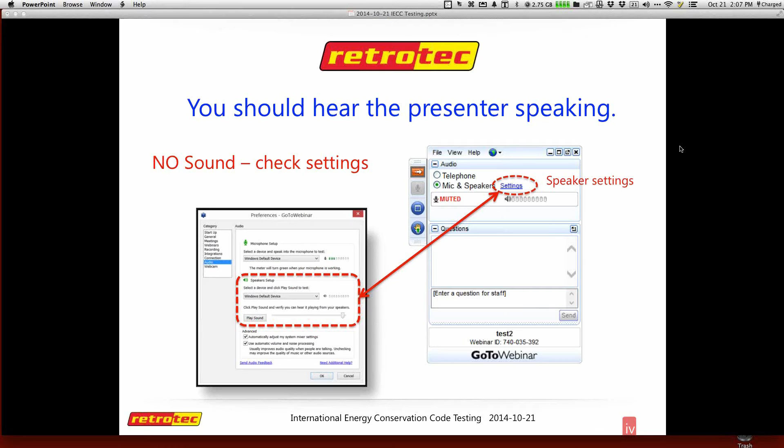I am actually an independent trainer for Retrotec. It is not my goal to sell you anything. In fact, some of my slides sometimes include Energy Conservatory, and it's our goal to promote the industry. So if you're looking for some of the information or illustrations I have here, they're usually in the quick guides, and they go through exactly what we're going to cover today. It's a great resource: under support, we have quick guides and webinars. All these things are a great library for you to pick from.

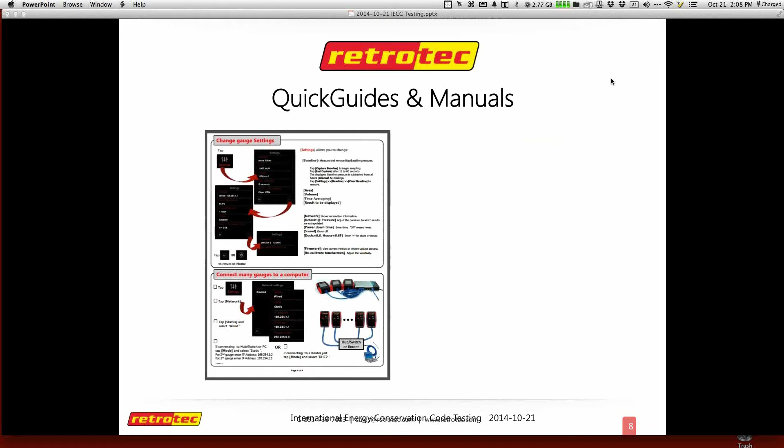The quick guides are like a field guide, a how-to, and there are some that are actually designed for code officials. The manuals are an in-depth study of the actual topic, from air sealing to blower door or duct testing, and many of them are several hundred pages that cover the topic in a variety of ways. So if you're looking for some phenomenal information, dig into one of the manuals. You can always reach out to Colin Genge directly if you have a question about them. He responds directly to your feedback.

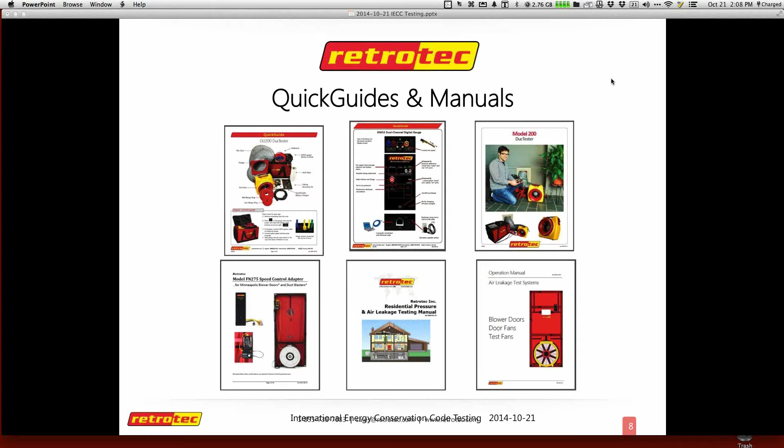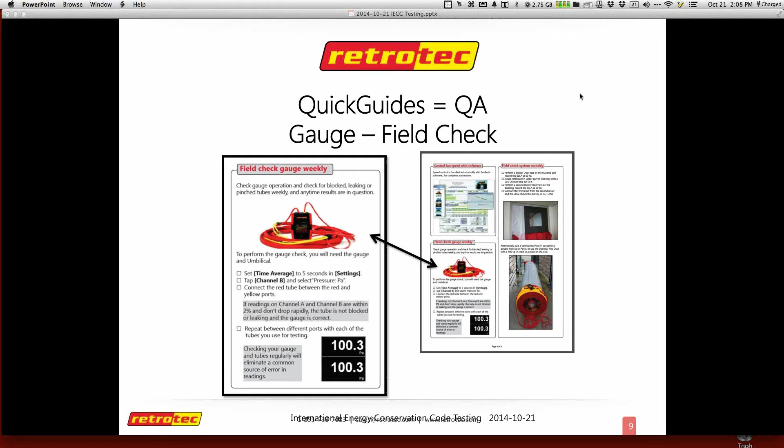So whatever you're doing, there's a guide to help you go through it, and they actually work as a great QA process because they have little check boxes on them, and they have ways to check your gauge that should be done weekly, or at least before a test if you're not testing weekly, and even how to check your blower door and other fan systems.

For those of you that have the DM32, the touchscreen gauge, you should make sure your firmware is currently on version 42. You can see that at the bottom of the screen when you first turn it on, or you can go to settings and toggle through a few pages, and it'll have firmware information. If it's not 42, you can hook it up to your PC with the configurator, or download the configurator if you've not done so, and we highly recommend you keep your gauge up to date, because there are lots of great improvements. That's why that gauge is such an amazing device, because it can actually update itself.

I am actually an IECC residential and commercial code plans examiner and inspector. I took my first test back in 2006, when there were trade-offs and other challenges.

So I am very in tune with the code and keep up with my certifications with ICC. I'm also a residential building official, non-practicing, but I play one on TV, or on webinars, and that's one of my personal achievements. I do want to go back and do some others.

If you have not thanked your building code official, I highly recommend you do so. Some are challenged individuals, we all have our idiosyncrasies, but their job is an incredible challenge to help guide builders on what they have to do while maintaining a great relationship in the community. So I highly encourage you to appreciate your building code official. Christmas is coming up soon, and they would gladly appreciate a gift certificate or a lunch certificate. So I always recommend complimenting those guys on what they do.

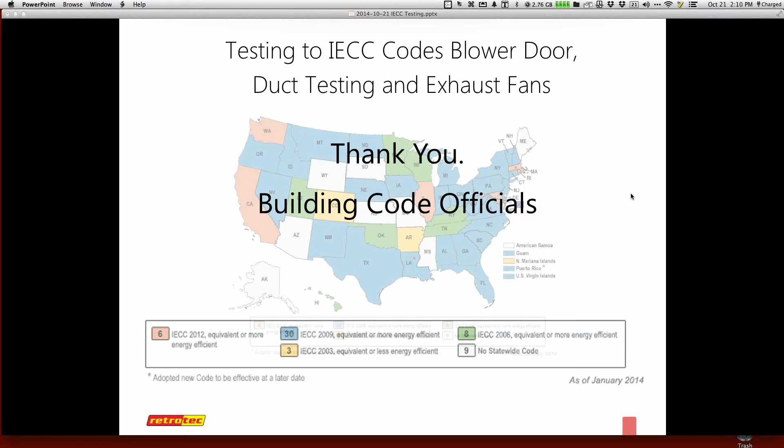And Jesse, I will touch on your thing about not reaching 25. So leave some of those questions up there, Jay, so I can check on them.

For 2009, the slide I had shows that leakage to outside is an option. The total leakage gets reduced significantly in 2012, and you can do it either at post-construction or as a rough-in, but it's the same number. In 2009, they gave you an advantage to do a rough-in, and there's even another option where you could do a rough-in without the air handler, which made it even tighter, so you're just testing the actual duct systems.

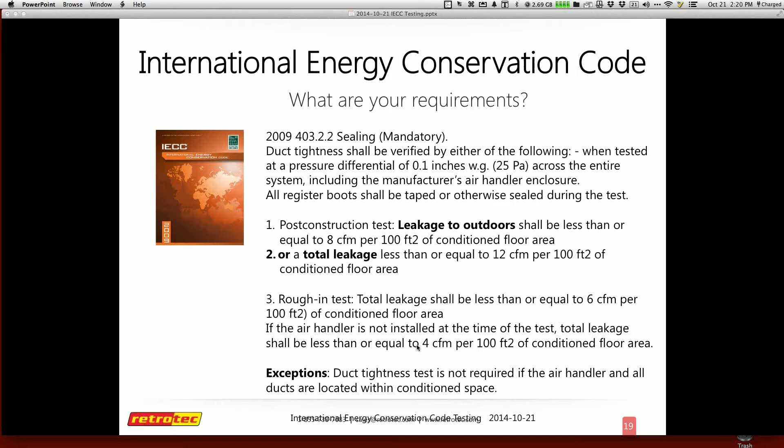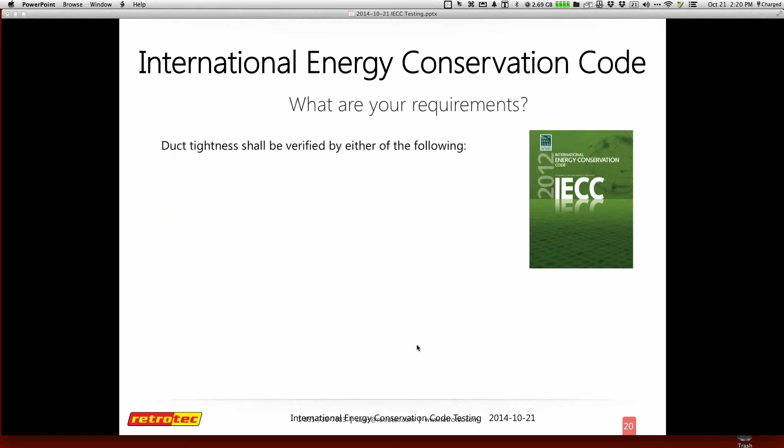So these are the criteria. Some people are still on 2009 code, or will go to 9 or adopt these themselves. Georgia adopted this with a few more amendments, and even adopted blower door testing at the same time. So the 2012 code really starts to make ducts incredibly tight, and if you're not on your game, it'll be a little challenging as to when this comes into play.

So we're now down to 4 CFM per 100 square feet. Just as a reference, years ago Energy Star, a high third-party standard, was at 6 CFM as a good achievement, a place you wanted to get down to, and then they got it down to 3. So the code is really trying to keep up with third-party building requirements like Energy Star and LEED and others. We really are pushing the limit and the envelope, literally, to create high standards.

So if you have questions about these, I can gladly go through them, but those are actually the requirements. There's some stuff to set up, which my slide didn't work well. Retrotec and Minneapolis do things a little slightly differently, but it's the same test, the same fan.

We highly recommend you depressurize. There are only a few jurisdictions that state you must pressurize, maybe because the flow is the same as the HVAC system, but the reality is we feel you get a much better test when you depressurize. When depressurizing the system for the ducts, you actually pull all of the duct mask really tight against the registers, so it has a really good seal. If you pressurize, you may have small separations you don't realize, with air flowing out of the register underneath the duct mask.

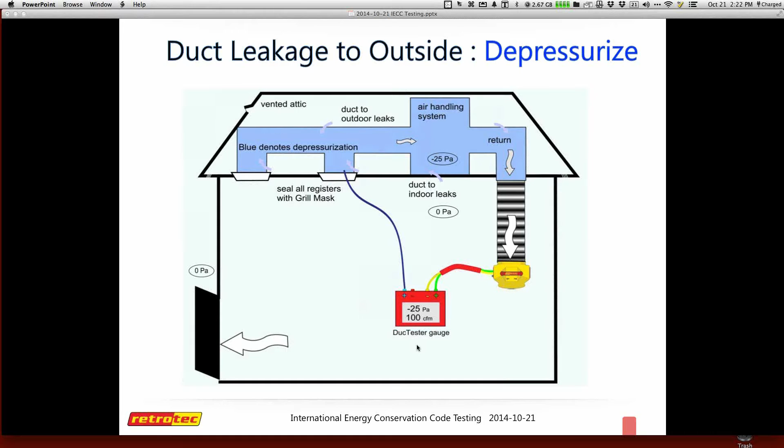And here's leakage to outside. I'm going to jump back to it because I want to show the process for depressurizing. So if I pressurize, same concept, sorry the slides got out of order, I forgot to rearrange them.

So now instead of depressurizing, we're just going to pressurize. You can notice I turned the fan around, and you can see the red ranges or rings on the bottom, and now I'm pushing air in versus pulling air out. Again, I could have some small separations with the Grill Mask, but either test, any testing you do, is a great test. So you can decide which one works well for you. The depressurization process has some other benefits, which I'll come back to.

Okay, I'm going to stay with pressurization because this is the common test everybody does. This is leakage to outside, a concept where I want to neutralize any leaks coming into the interior. All of my leaks are now considered total leakage at this test, because it could leak from the ducts in the attic or crawl space, or from a return or something else that leaks to the inside.

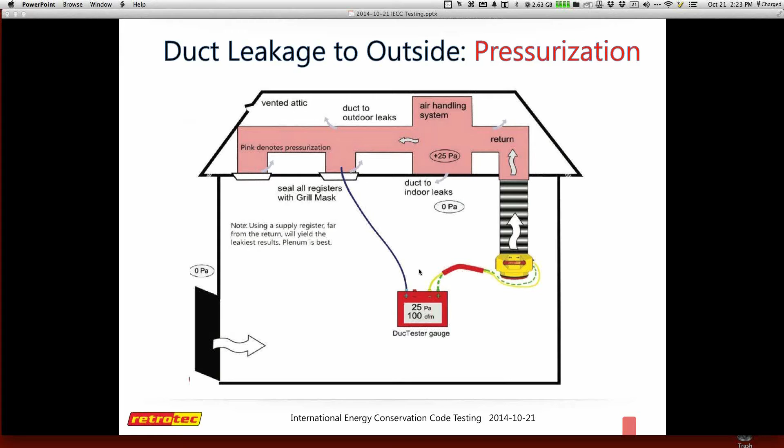When I set up a blower door and pressurize the interior of the house, this area down below gets neutralized because I now have an equal pressure across the envelope. So I separate the ceiling or the floor, wherever the ducts are, from the house to the outside. Now the only place it can leak is outside.

One method of testing is I can bring up the fan to 25 pascals, then take the ducts to 0, which creates a neutral pressure. But on the Retrotec system, here's the duct tester where my pointer is, we've added an extra reference, which is the red. I'm now referencing outside, the same place the blower door is testing, whether you combine the tubing or run your own tubing outside, so now I'm referencing outside for the duct test. It has its own separate reference.

This allows you to go to 25 pascals and not try to find 0. It also allows you to use the add feature on the gauge, which will help you confirm what your results are at 25.

I'm going to go back to the slide I had a second ago. This is why this is one of the tests I think is useful: usually you set up the blower door and depressurize as a standard operating test. If you depressurize your ducts, you can do one and then do the other, and everything stays the same, nothing to actually change. Then I can seal off the ducts and do a total test. So this was my leakage to outside, and then this is...

I'm missing a slide. There it is. Sorry, I'm missing a slide, that's frustrating. Anyway, I'm going to move past that.

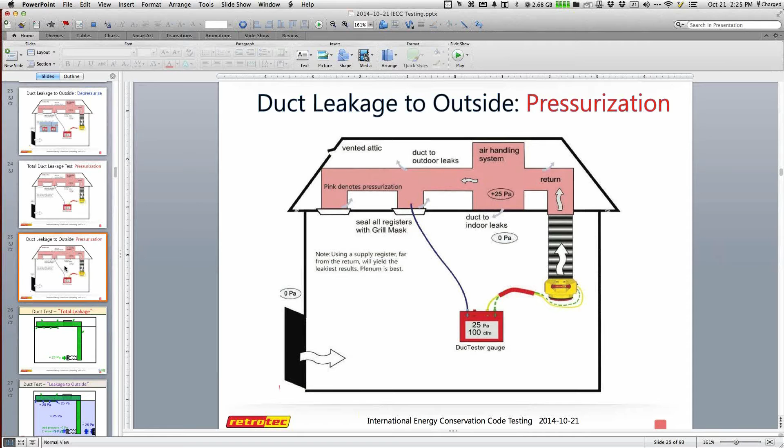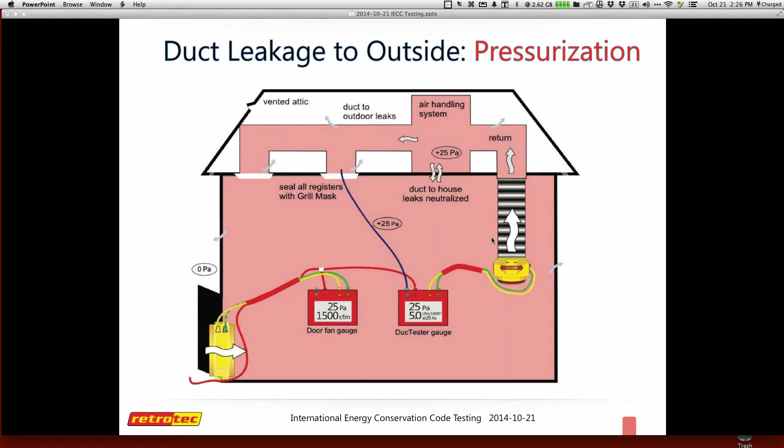It's similar to the concept where I had pressurization. You can do the same with depressurization. Somehow I lost the illustration that showed up with that, but instead of pressurizing both, I can depressurize both and it works the same. They will just pull on each other until they equalize at the same number, so it'll be negative 25 and negative 25, and I can get a number that is leakage to outside.

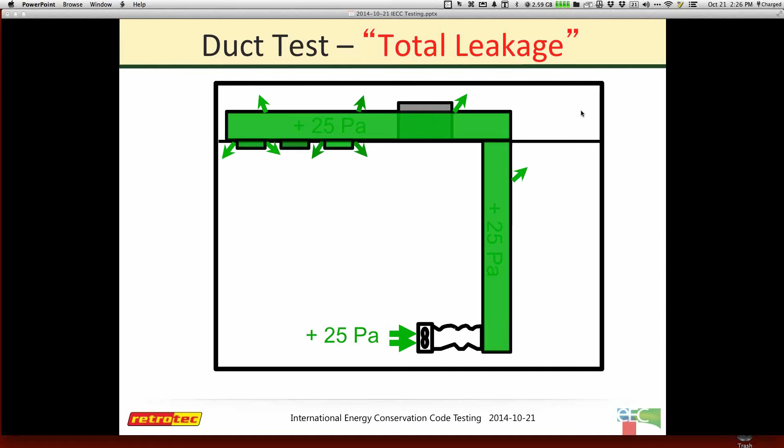Another way some people test is the test to 0 method, which looks similar: I have my duct tester normally set up giving total leakage, and then I can move on to adding a blower door, and now I'm going to pressurize the area. So this is a pressurization test, and wherever I have leakage, I'll end up with air moving into the ducts. This is the test to 0 method, where I add my duct test, and it will pressurize until it gets to 0 and negates the actual area that's in the house itself.

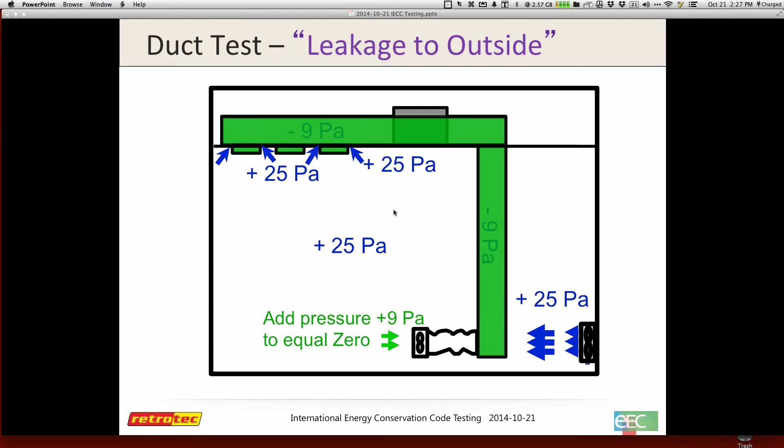So there are 2 ways to test. The code does not clarify which way you go or how you actually set that up. I didn't have a lot on duct testing because many people are already doing that. A lot of people are headed towards the blower door.

I just want to see if there are any other questions. Al asked, what's the advantage of putting the hose outside to a manometer? The advantage is that I have a much easier way of maintaining the pressure at 25 versus trying to get it to 0. If it goes past 0, it's a lot easier to let the gauge do the work. It's hard to tell the gauge to go to 0 or set pressure 0; a lot of times it overshoots 0 and doesn't want to come back.

So you can do it manually on the fans, but it's a lot easier to set up my system where I can tell the duct tester to go to 25 pressure or depressure, and do the fan. As long as both fans are doing the same thing, pressurizing or depressurizing, it's a really stable way to test and confirm what you have, and you get to use the add feature to confirm that.

Hey Joe, we got another question here. Are the grills still taped when doing total leakage? So total leakage is when the grills are sealed off, right? Because what I'm trying to do is just the duct tests themselves. So for total leakage, I've sealed off the ducts, and I just want to find out where they leak.

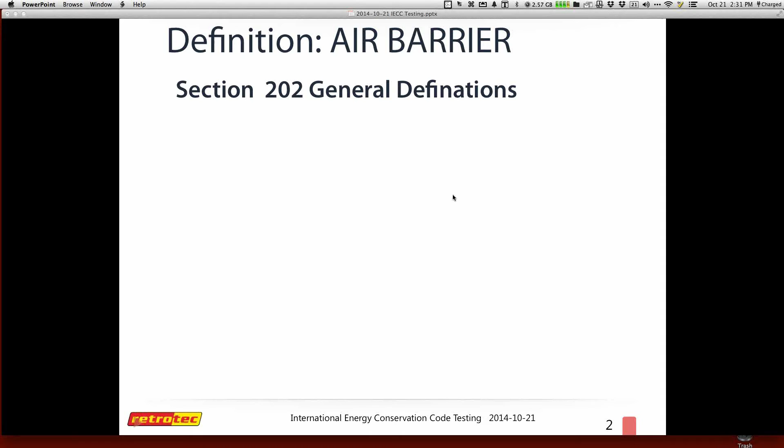Any other questions on duct testing real quick? Check it over. Yes, my point - it depends on which method or how you want to do your blower door duct test as to when you'll decide to cover them to do a total leakage. And confirming, when I do leakage to outside, my registers are open, they're not sealed, so I can actually get a separation right there.

Okay, so moving on to blower doors. If you still have another question about duct testing, we'll gladly grab that from you.

Blower doors are something many municipalities are moving into, and for some reason they find this to be the more challenging test with potential issues. The reality is they're right for one reason - if you're going to test the house when it's completed and ready to move occupants in, and you have issues, they are not easy to find or get to. With ducts, many times they're fairly accessible, and I can get to them at any stage, whether it's attic or crawl space, unless they're totally sealed off inside the area, and a lot of times they weren't tested anyway.

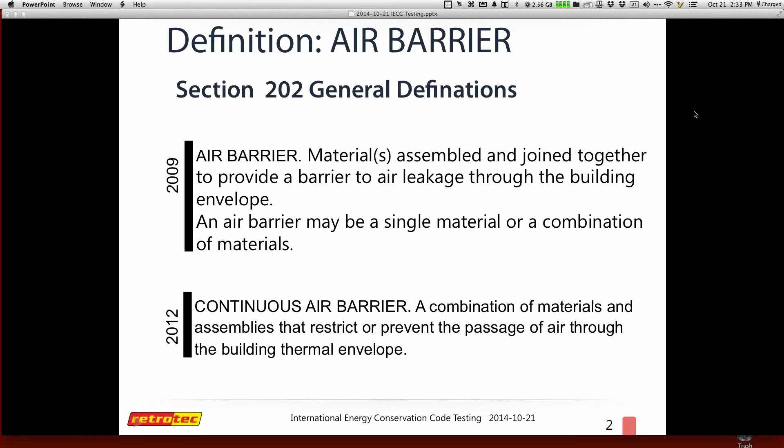I will not take on the debate on whether or not house wrap is an air barrier - that's another day. There's the ABAA, Air Barrier Association of America, which has some phenomenal videos and criteria about what is considered an air barrier. But basically, if air doesn't move through it, in general, it's considered an air barrier.

The code has this phenomenal checklist, and if you're new to blower door, if you're working with a builder, I highly encourage you to make sure that they check these 17 areas. Most people that actually do a good visual assessment pass. When they're just hoping that they do what they normally do without actually being very detailed, that's when things happen and it's already too late to get to them. So this checklist, and many times it's actually required even if you test, that you must actually comply with this checklist.

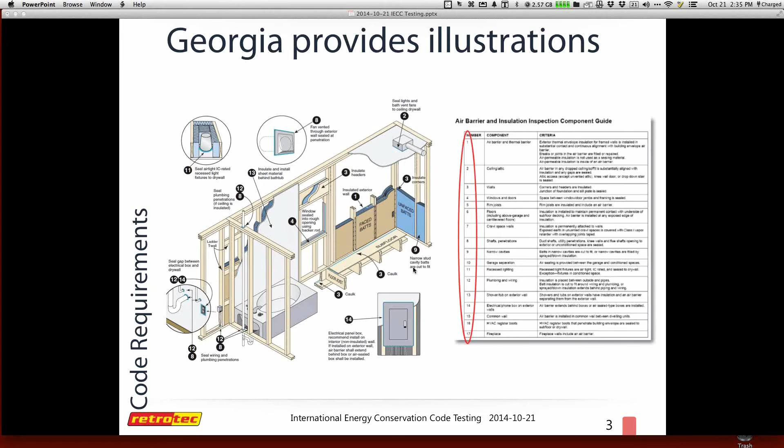So Georgia created some phenomenal illustrations that actually coordinate these numbers specifically to the code and where it is. So if you're dealing with, you know, areas around the tub, those actually coincide to the numbers that are here, right? So most people ask, oh, where can I get these? These are free. You can use these for yourself, give them to building officials, give them to contractors, whatever you want to do with them, all right? They are a phenomenal resource. And they really kind of do highlight some of the realities that you see on the left and how those can get overcome.

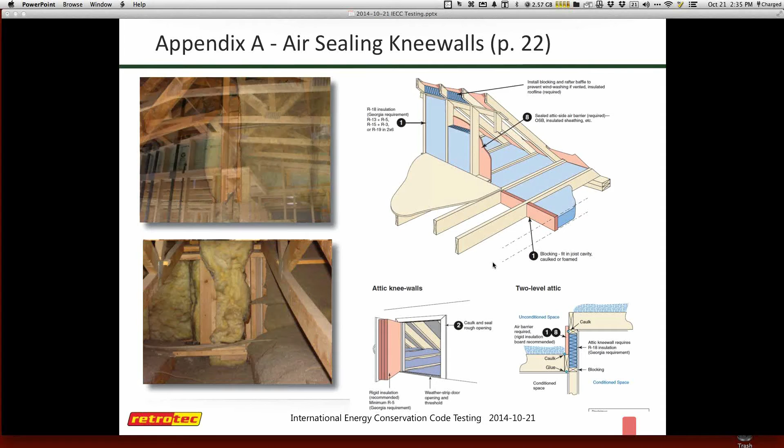The one that's mostly a common challenge for people is the attic and the knee walls. You can see now what a typical knee wall would look like, but now it has to be encapsulated on all 6 sides with an air barrier that also complies with your ignition or fire rating concepts. So these are what a really well done attic would look like. These knee walls are taken care of ahead of time so that you could insulate from the interior and everything happened all at once.

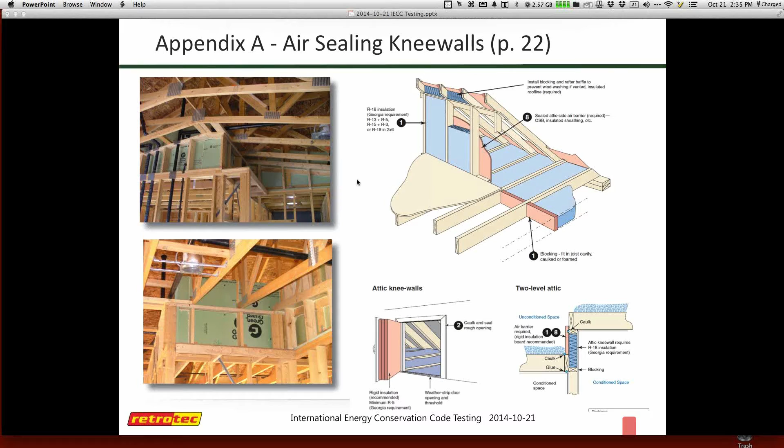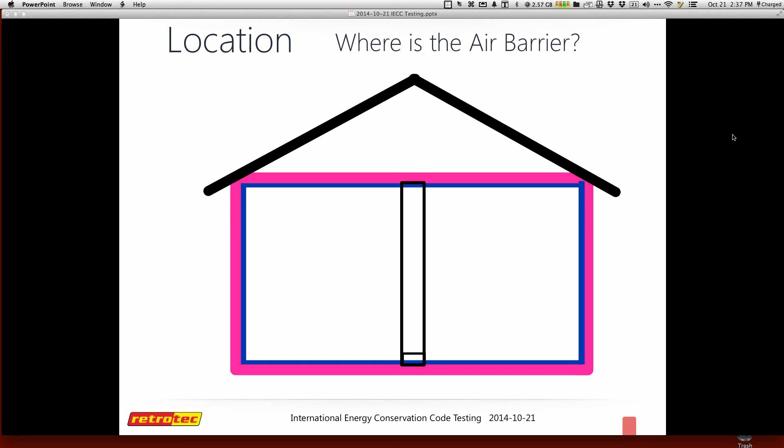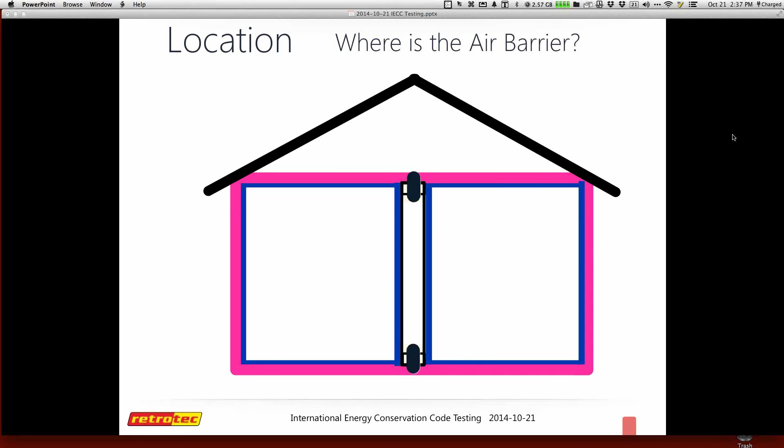But what happens is that we actually start cutting holes in it, and we add some framing. I've got other things that start showing up. Now my air barrier has been separated. Now I actually have connections between the attic or crawl space from some holes for some electrical wires. Now I've got pathways for air to be moving directly up and down my walls and come out either receptacles or plumbing openings. And if you add your air handler or can lights or a junction box, once I penetrate or cut any part of the air barrier, then that element actually becomes the air barrier.

So if you start following the air barrier around, you can see that the junction box becomes the next connection between inside and outside, or the air handler will also now become your air barrier. If there's leaks in your duct system and you run your blower door, which is where we're headed, it will actually allow air to move through your air handler or your duct system and come out the registers when you have leaks, because it actually wants to know where's the separation between inside and outside, and it will help you find all of these locations.

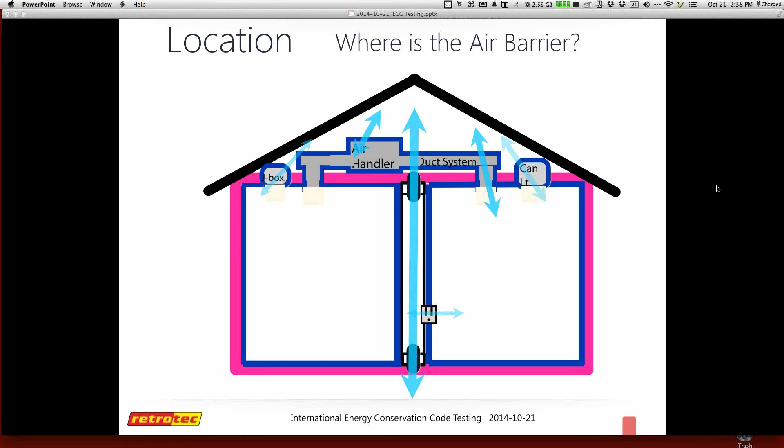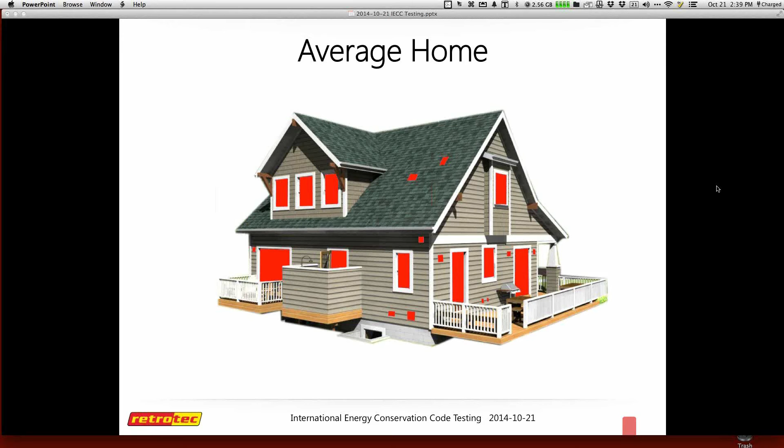So we take an average home and we kind of cut it apart. We put a bunch of darn windows and doors, and we add openings for receptacles and vents in the roof, and so we end up making this monstrosity of a whole bunch of openings. Most of your windows are phenomenally well sealed. It's the large opening around it, and same with the doors. So we have a much larger opening than we do actually for the door or the window itself.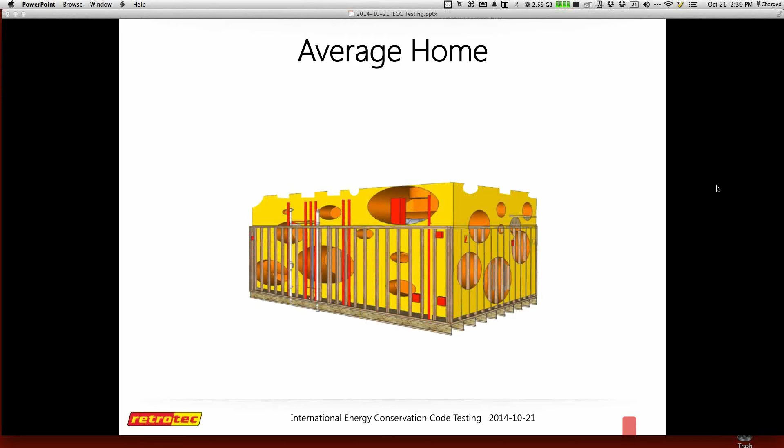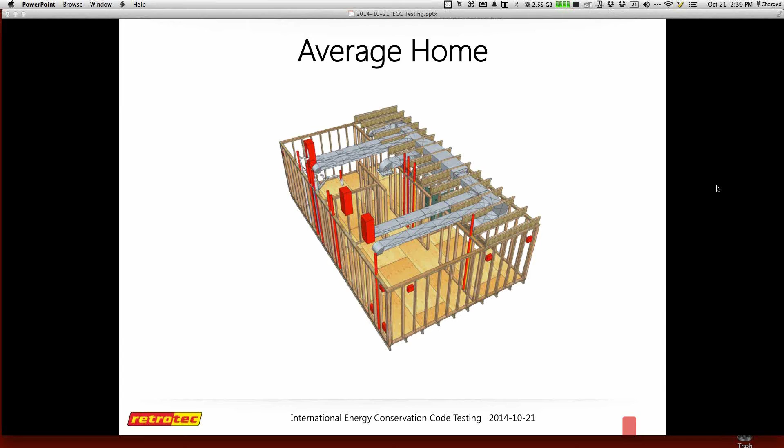So I made this illustration that tries to show what our homes really kind of feel like to me. And it isn't always just the envelope. It actually becomes also the conditions that are connected between floors that also are a major issue, whether it connects to the attic or maybe it connects two floors or to the crawl space. These are just some of the penetrations that happen from plumbing, not including electrical or can lights or some of the other smaller openings that all add up to large significant leakage between attics or other floors or exterior and interior, so we're back to this major Swiss cheese element of a house that we end up creating.

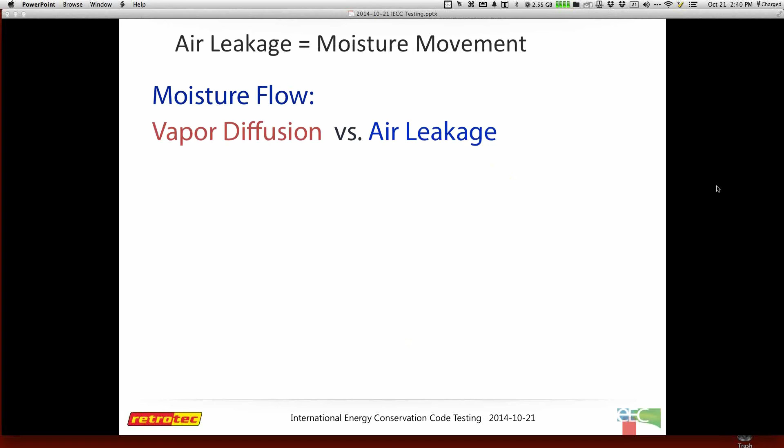So we have a whole lot of openings that are in the house, and our goal now is to actually test them and figure out what these issues are. This is a quick illustration that hammers home why these little openings make a big difference. This is from buildingscience.com, a study that Joseph Lstiburek did. I'll explain the study briefly here, and that is that I have 2 sheets of drywall on each side. They're both a 4x8 sheet of drywall. They both have the identical temperature and relative humidity. So it's only 50% relative humidity, very, very tolerable. 75 degrees, very nominal, right?

And so one is actually diffusion, where you have moisture that moves through materials. All materials usually have a diffusion element, or one small square inch hole based upon these small conditions, right? So after 1 week, they measured how much moisture can move through a tiny little 1 inch hole. And over here we have 1 1/2 pints of water that diffuse through the materials. The other side has 14 pints of water. So it was a significant amount of moisture that comes through a small hole. The average home has an opening that's equivalent to around 2 square feet. That's actually a code compliant house. So it's easy to imagine how much moisture load gets pulled into our houses year round. So it's a phenomenal illustration.

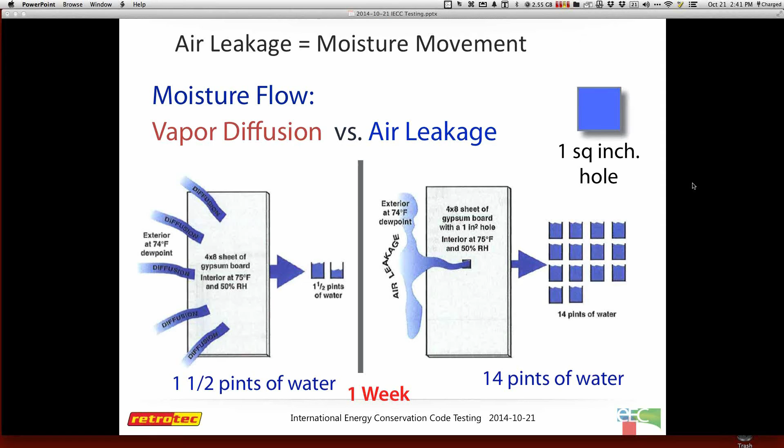So I'm going to go through some basic stuff about how the blower door works. Basically, we're going to set this up at any door. Usually it's the front door, but if the front door is too big or is a double door, you can also use it at any other door that has a free air pathway on the other side. So you can use the garage or the back door as long as there's no restrictions for air to flow out of the doorway itself. And we're going to create a pressure difference, and the fan itself will also measure the pressure inside of it and convert that pressure inside the fan to CFM. And then I can compare that CFM in a calculation to other houses, and it's actually a standard, which is why this is a great testing method.

It allows me again to compare to other houses or find leaky paths. When the blower door is running, if you have not experienced this, it is shocking the amount of air that flies out of your receptacles and switches, or underneath your trim and around your floor, around interior doorways where air is coming straight down and finds its way out of that path.

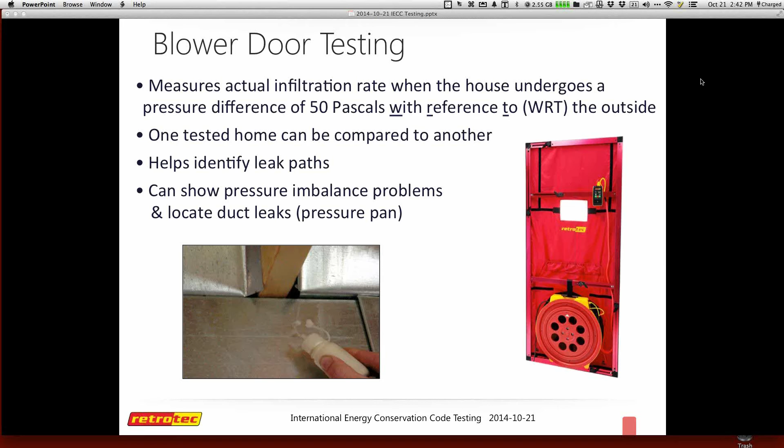We measure the difference in what's called a Pascal. 1 Pascal is such a small fraction of pressure measurement, it's almost impossible to really describe. So we do duct testing at 25, right here. This is our duct test, and we do the blower door at 50 pascals. And 1 inch of water column, which is basically using a straw to try and suck up liquid 1 inch, is 248, we call it 250 pascals. So we're only using 0.2 of that, a fraction of that, and this is 0.1.

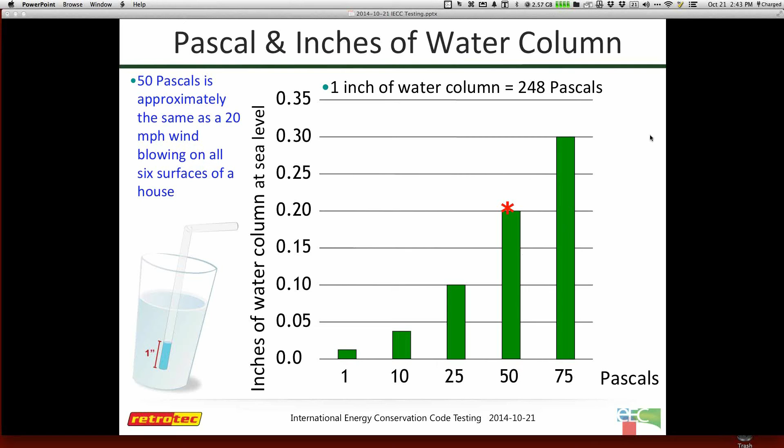So next time you have your drink and you have a straw, just make a mark that's 1 inch apart and see how little effort it takes to move 1 inch water column, or if you can just move it a tiny bit. The bubble itself is actually more than 50 pascals. So it's an interesting comparison as to what a Pascal means.

So I have my blower door. It's in the front door, whatever door I have. I'm going to set it up to depressurize. The code actually doesn't clarify that, but I can tell you that depressurization for a code house is the way to go. You're going to depressurize the house, and I'm going to create a 50 Pascal difference. That's when I know I have enough pressure difference between inside and outside that I can then make a measurement that I'll convert to CFM.

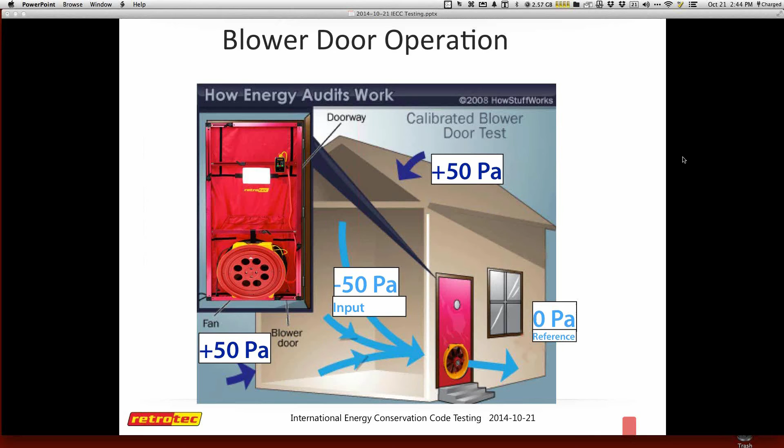So what it actually does is pull air from inside to out, and then it also will show me where else I might have leaks that are inside. So anywhere where I'm taking 50 out, in theory I have 50 Pascals coming in. These are actually pressure measurements, but it's easy to understand the concept of pressure out means I must have some kind of pressure or air coming in. So here's the basic understanding. So I'm going to set up my house with a

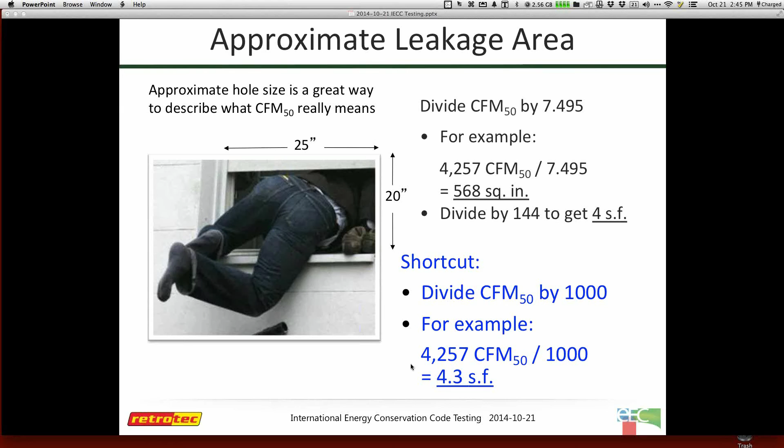Here's the basic overview of doing a test, and that is that you really should evaluate the crawl space, the attic, and the duct system, even if you're doing a new home, to make sure there are no issues. If the duct system is totally separated, it will affect your blower door. I highly recommend you make sure all the doors and windows are locked and the garage is fully sealed off before you perform any kind of a test. It's common that people show up, pull out their fan, start testing, and realize that there were some other conditions that they really should have just done a visual look at.

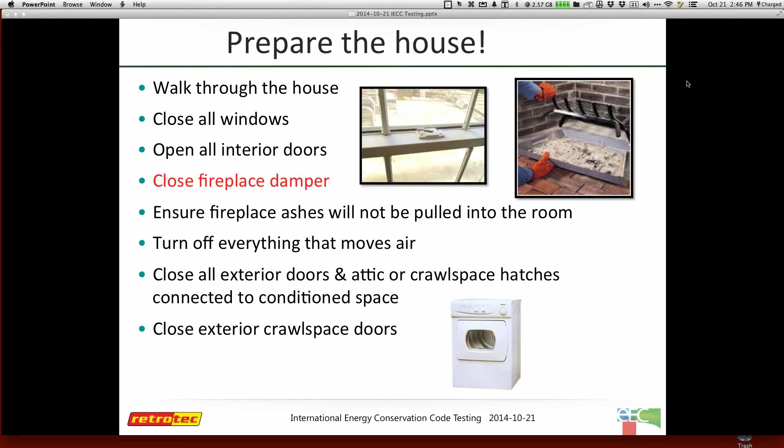In general, you're looking for issues that may have a problem. Again, if it's a new home, these things don't commonly occur, but some people do use the fireplace in colder areas to heat the place before it actually is occupied. So you want to make sure you check some of that, and that there's nothing on, nobody's drying their shirt that got wet in the morning in the dryer. All other fans are off. If you have hot water tanks, you want to make sure they're turned to pilot and leave your keys there so you don't have to come back later to find out why there's no hot water.

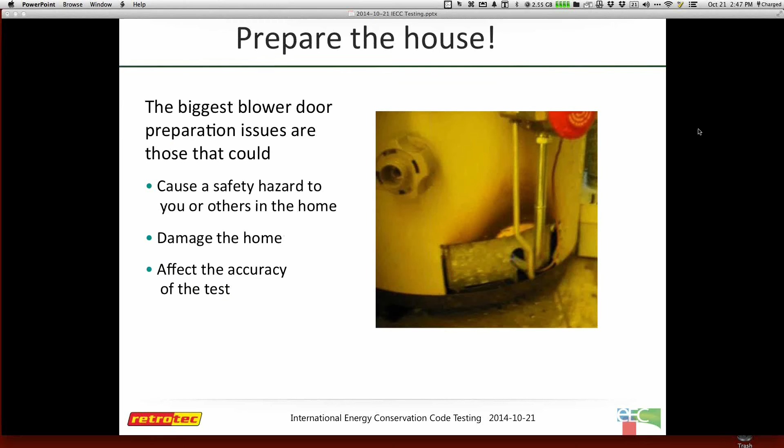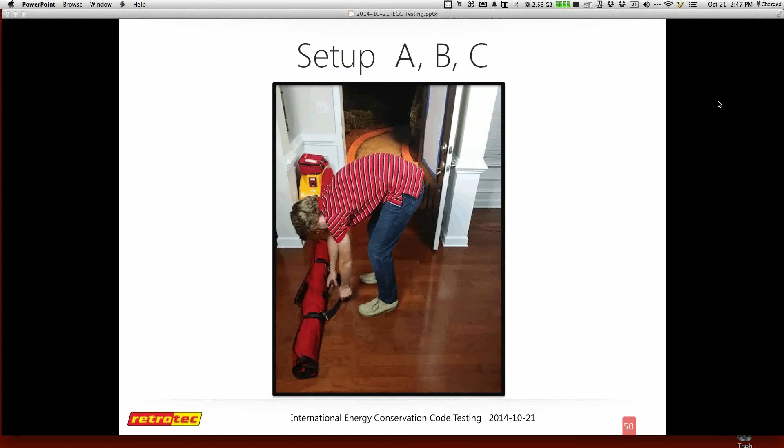Thermostats, you want to set them to either off or adjust the temperature so they will clearly not come on. And again, even though it's code compliance, you still want to be cautious about any kind of combustion appliances that are in the house. Your goal is to do no harm or make everybody pass out while you're doing your blower door test, because you are bringing in fumes from someplace else. This is a quick basic overview about how simple a blower door is. This is about a 2-minute picture overview of where you take the frame out.

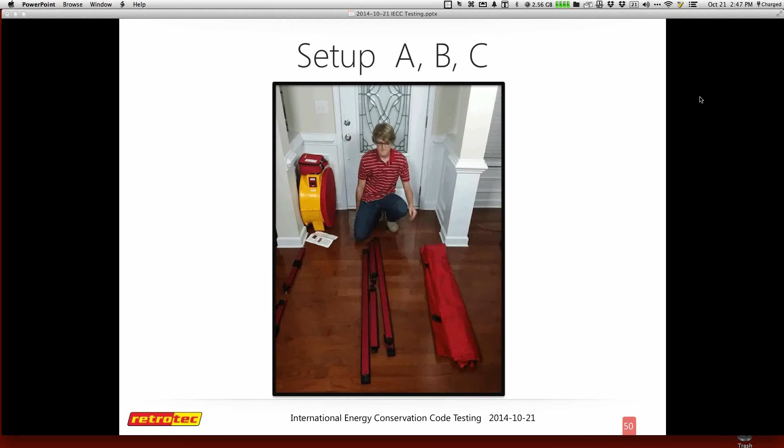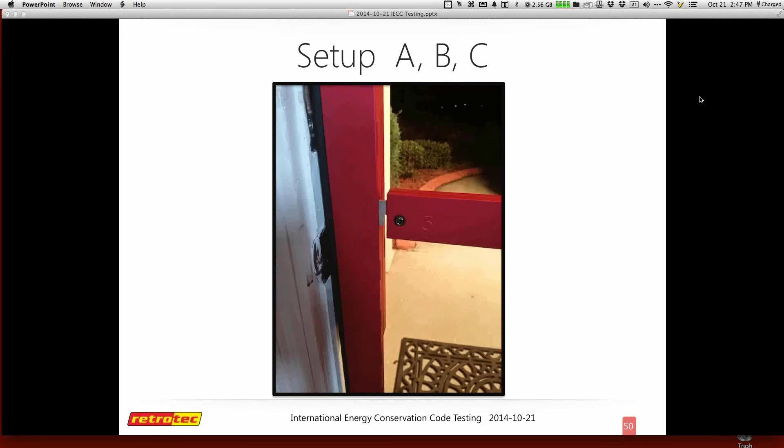Retrotec provides these phenomenal instructions that are simple checklists, like I mentioned earlier. The frame snaps together, and you're going to take it to the door and do a quick overview. You want to make sure that you have some extra room around it, because when I bring it back, I'll have the cloth there, and I want to make sure I have some extra room. I can add my crossbars. The new frame that Retrotec has has 2 crossbars, which is a great feature, very stable.

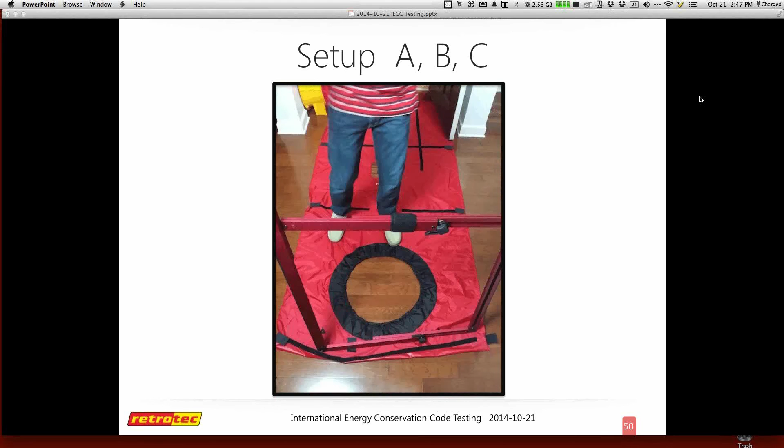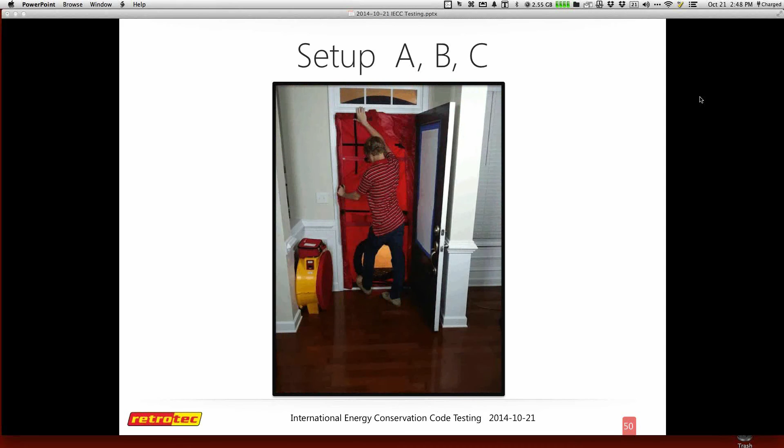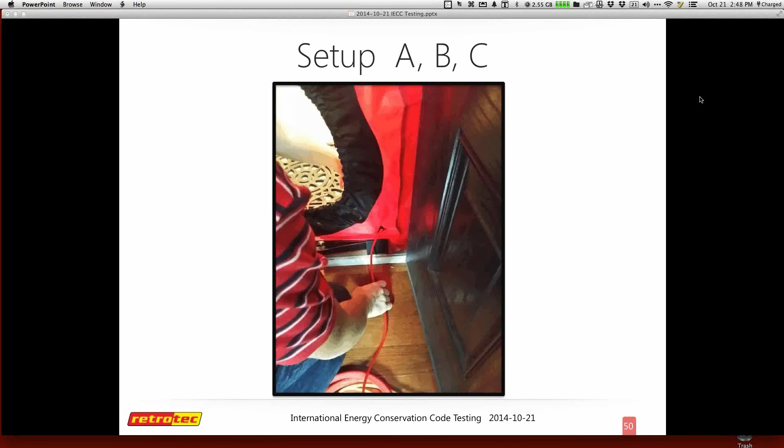This is the cloth that actually will separate the inside from outside. You lay your cloth down, and they have done a few nice little features. They've added some pockets. They've readjusted their Velcro. And if you have any improvements about how this stuff works, most of these have come from users like yourself. So you make sure it's secured, you put your foot on the bottom, push things around. There are some cams that are engaged. Both manufacturers are very similar in how this whole structure comes. You want to make sure it's fully secured in the doorway, because when you turn this on and create a pressure difference, if it's not really well secured, it will all fall flat onto the floor.

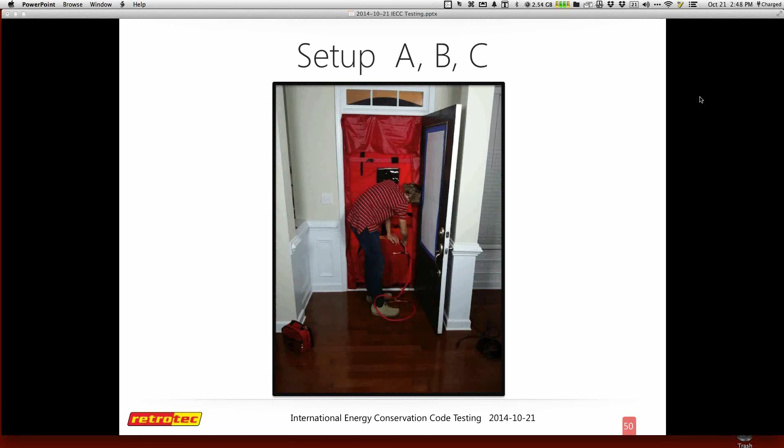What he just installed was a reference tube to go to the outside. You want to make sure it's fully away from the fan itself so that the pressures from the fan as it blows out don't interfere with the actual test itself. You connect the gauge, whichever gauge you use. It's a very simple procedure.

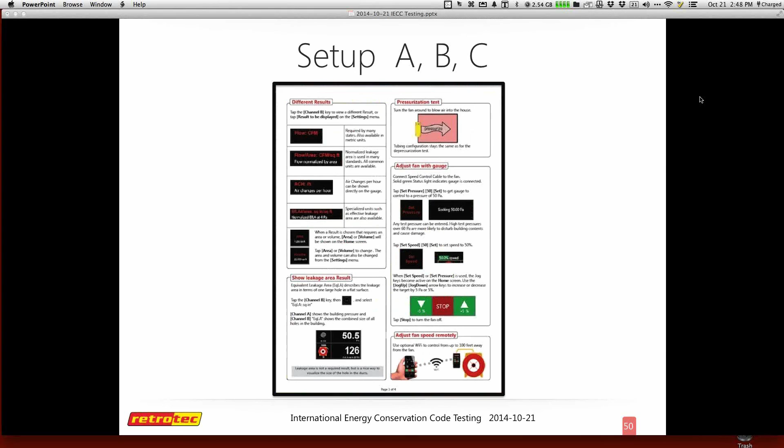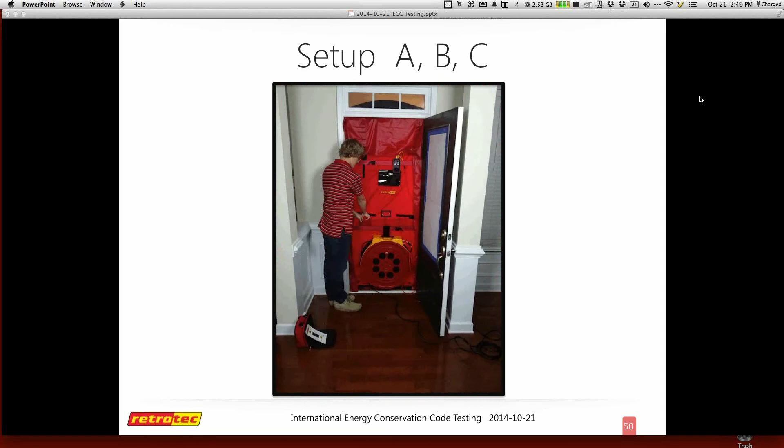Add some power. Notice that the fan is covered right now, because what you're going to do is set up and create a baseline, knowing if there are any kind of pressures on the house that are different from inside to outside, and you want to zero those out, whether it's significant wind or an amazing stack effect, which would be a pretty phenomenal number, or just other conditions.

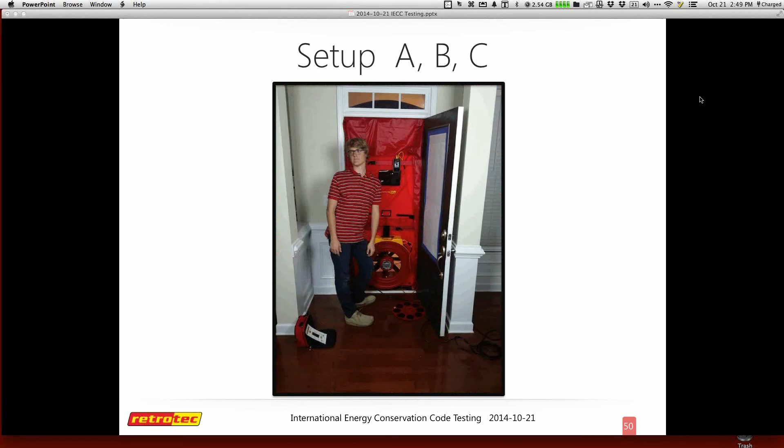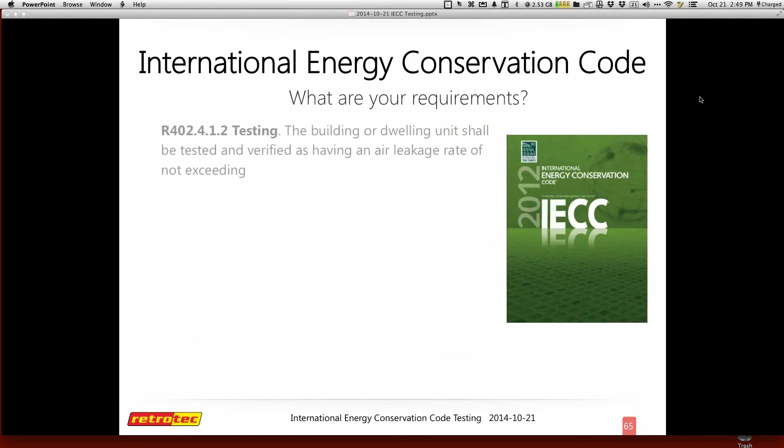So once my baseline is set, we highly recommend people go to 20 or 25, make sure nothing is falling apart, and then go to 50 to get your results. So these are the requirements for doing a blower door test with the 2012. Most communities are altering these requirements, so I'd like to also get some feedback about people who felt that 3 air changes per hour was impossible and have altered that number.

If you're dealing with 3 air changes per hour on a small home with a slab, it is a difficult test to achieve. I have an illustration about how air change per hour works, but air changes per hour basically means how many times all the air in the house gets pulled out of the house while you have a blower door running. When I have my blower door up, it's pulling air out of the house, and I can calculate how many times all the air left the house, and that's 1 air change. And when the blower door is running, I can determine, do I have 3 air changes per hour or 5 air changes per hour?

And so for the lower states, Zone 1 is only the tip of Florida. Zone 2 is chunks of maybe Texas and parts of the South, but most people are in climate zone 3 or more, so 3 air changes is a challenge to achieve. So if anybody's having success with that or has altered that, that would be great feedback.

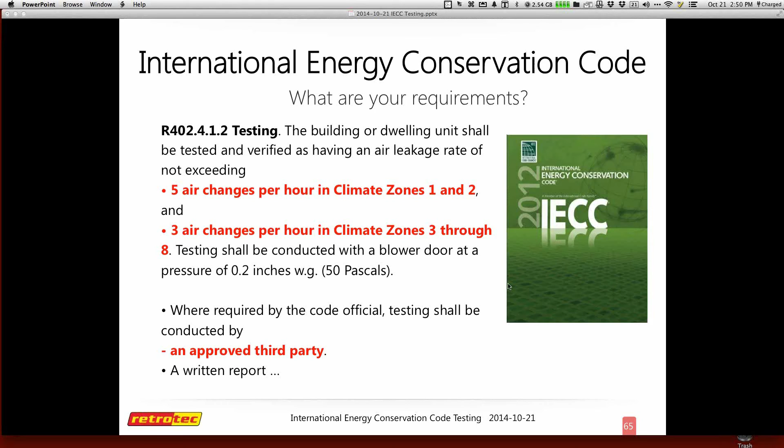So Alan commented about doing a pressurization and depressurization, and that is actually kind of a commercial type of standard. It can be done. What you'll find out is all of the dampers that the house has really should get pulled tight when you do your depressurization test. That's why people depressurize. And if you pressurize, you may be negating any kind of wind issues that may be affecting the house that day, but you're going to end up opening up a whole lot of other openings that aren't really supposed to be sealed technically.

So in general, you're better off just doing a depressurization test, and if it's a really windy day, I would just come back later in the evening or early in the morning when the wind may not be such a factor. These are the requirements to do a blower door test.

Yes, Jay? Thanks. I was going to add to that. I also mentioned in there, Alan, to keep in mind that the most important thing is if you're going to do that test multiple times, which you probably are, if you don't pass the first time, then obviously you're going to want to fix it. Or if you're working retrofit, you just want to make sure that everybody is doing the same tests the same way. So I think that's probably the biggest thing. You don't want one guy pressurizing and then one guy depressurizing. And I hope that helps a little bit.

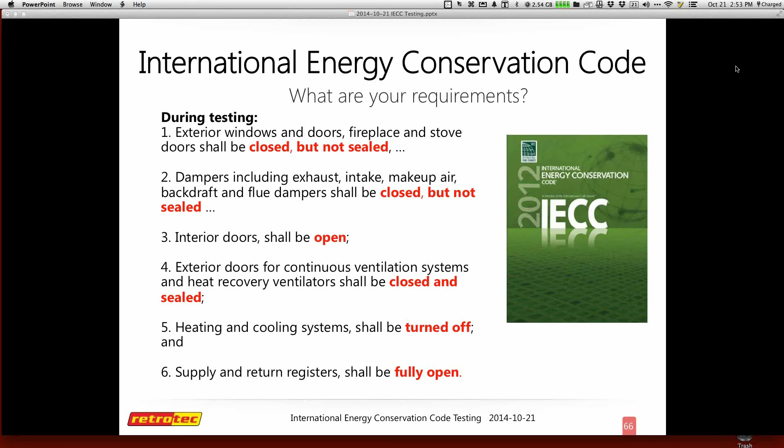So these are incredibly simple requirements for doing a test. And if you compare this to a RESNET standard, which is 28 pages, most of the requirements in the 2012 are only part of 1 page. So there are multiple things that they did not include in terms of testing requirements, or I think they just assumed that whoever did the test would know what they were doing.

So I think they're going to revamp that as time goes, and if not, I think they'll find out that they need to add a few more criteria. Air changes per hour is based on volume.

So like I mentioned earlier, if you have a small house on a slab, it's tough to get to 3 air changes. But if you actually have a larger volume in the house, then it's a lot easier to complete that pathway of actually getting to the air changes you need.

So homes that have a basement usually don't have a lot of air leakage around the basement because it's either enclosed with earth or the blocks are fairly well sealed or it's even finished. So that really allows this super bonus volume that allows you to easily pass.

I went out to Nebraska a while ago and we tested a couple houses, and it was clear that if we took out the basement as part of the volume, the upper half would not get to 3 air changes per hour. They were lucky to get to 8 or 9, but this extra volume clearly made a difference for their ability to pass that test.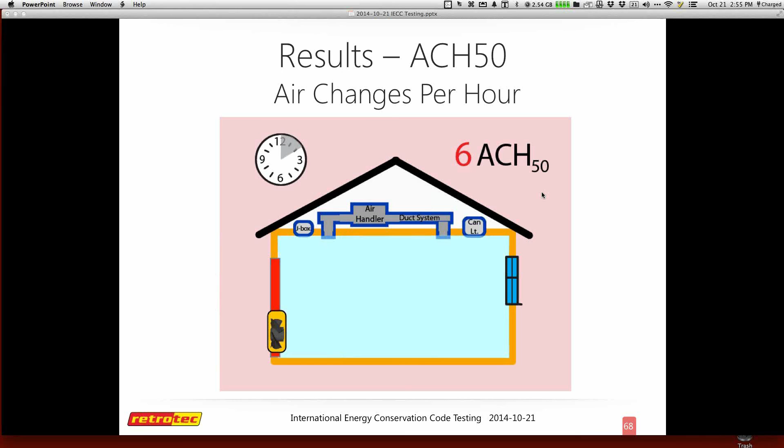So that helps us to measure this and do a calculation to confirm. I use 6 as a generic number, but your goal will be to get to 3 or 5. Georgia now is at 7. So I'm trying to illustrate that when I have my blower door, it can actually calculate the CFM, cubic feet per minute, in the fan, and then I can apply the calculation. So here's a simple illustration of the calculation.

So I have to determine the entire volume of the conditioned area. This is the actual way to calculate air changes per hour. The final fan flow is the CFM that comes from the gauge. You multiply that by 60, because I went from minutes to an hour, and divide it by the volume. So if I had 1900 CFM times 60 divided by the volume, I end up with 3.45 air changes per hour at 50.

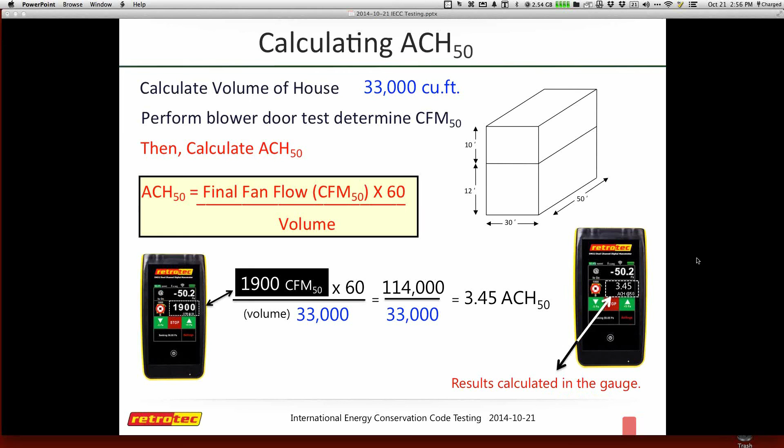And you can do it on your calculator, or the DM32 or the DM2 will calculate this in the gauge live as you actually test. So you can confirm exactly what my air changes per hour were while I did that test. Oh, that's moving the wrong way.

Here's one of the questions I get frequently: when is a house too tight, and when does a house require mechanical ventilation? Clearly it's less than 5 air changes per hour at 50. And if we go back to our 2012 code, that means everybody. So it's kind of a catch-22: if you're less than 3, you're going to need it, and if you're going to comply, you are maybe at 5. So there's a gray area with how you interpret your numbers, whether you are 5 or less than 5.

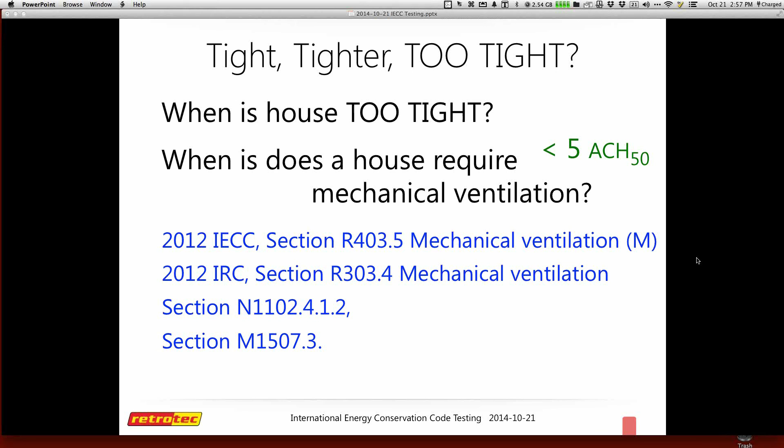So if you test and confirm that the house was less than 5, technically you should be adding mechanical ventilation. If somehow you achieved 5, you might be able to get away with confirming you do not need it. If you're above 5, you don't pass your certification anyway. There's a variety of places where this is referred to in the IECC and IRC, in the mechanical code. All of these highlight the requirements.

I don't have the slide that shows it, but basically exhaust fans in a bathroom need to be not just rated, but actually performing at 50 CFM, cubic feet per minute, and your exhaust fan in the kitchen needs to be at 100, and again, not rated, but actually performing at that level.

There's a variety of ventilation options: just doing negative, where I just have exhaust fans, or basically positive, where I bring air in with the HVAC system. Another option is balanced, which is ERV or HRV.

If you're trying to determine your compliance, what your options are, or if it's working, we send people to RED, the Residential Energy Dynamics website.com. Rick Karg and his associates have a phenomenal website to guide you through whichever test you're doing and whatever you're trying to achieve, with awesome help features to confirm where you're getting your information. So if you want to understand more about ventilation and the requirements, this is the place to go.

Here are some methods to test your exhaust fans as we wrap up. You can use the Energy Conservatory exhaust fan flow meter. It's kind of like a large plastic box or cake cover with a slider that allows you to control how much air moves through it. That device works great on any of the Retrotec manometers.

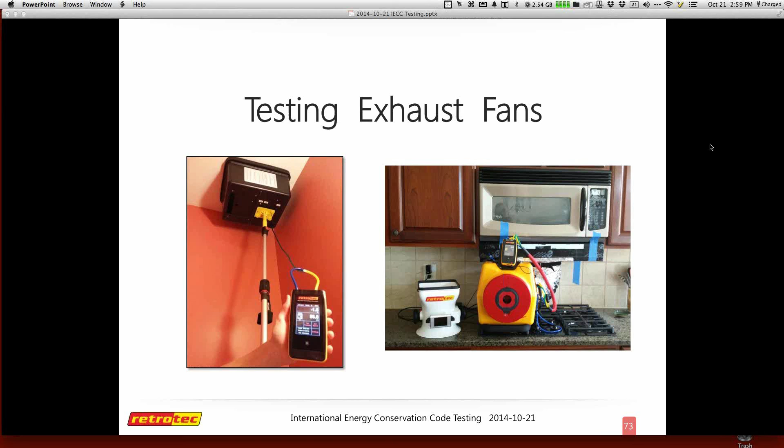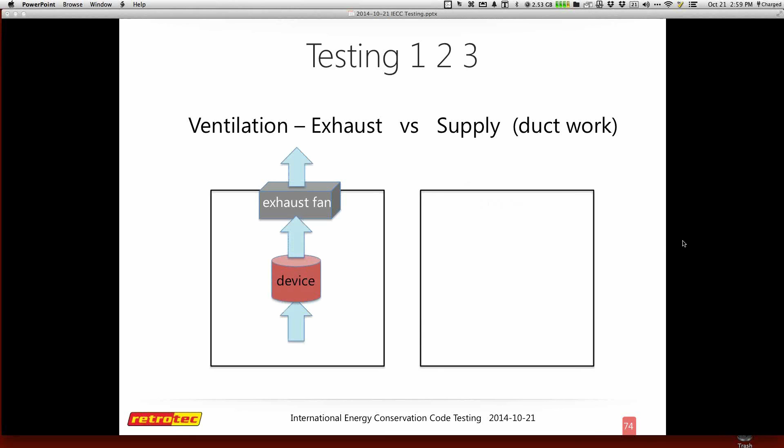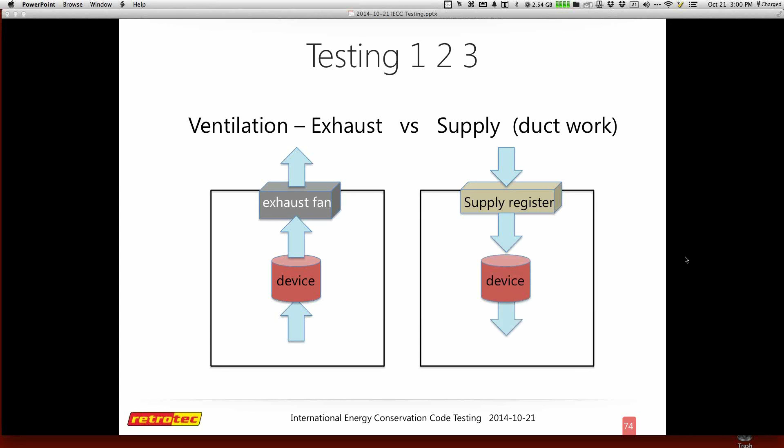Here's a basic understanding about the differences: with an exhaust fan that pulls air out, I can have a device that clearly reads the path that goes through, versus a supply or ductwork where I'm actually bombarding the device with a lot of pressure, making it more challenging to read. So a powered flow hood, whether you use your duct tester or a special powered flow hood device, actually has a fan that will equal the pressure that moves through. When the fan spins at the same speed as the other fan, basically the same amount of pressure or air moves through, and then I'm able to measure that as a total.

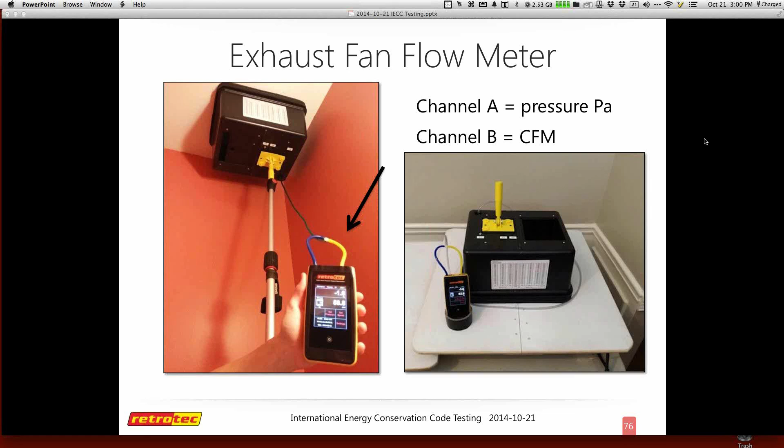So the exhaust fan flow meter does well. Everybody asks why doesn't Retrotec have one, and I'm sure it's something that may come out in 2015, but it works great for determining whether or not your exhaust fan is working correctly.

You can also use your duct tester, as I mentioned earlier. Basically what you're going to do is use the blue tube, which is the input, just below your exhaust fan. Usually you can have some kind of box or something that may help with the pressures here. Once the duct tester has the same amount of flow, moving the same amount of air, then I can actually convert that into my actual results.

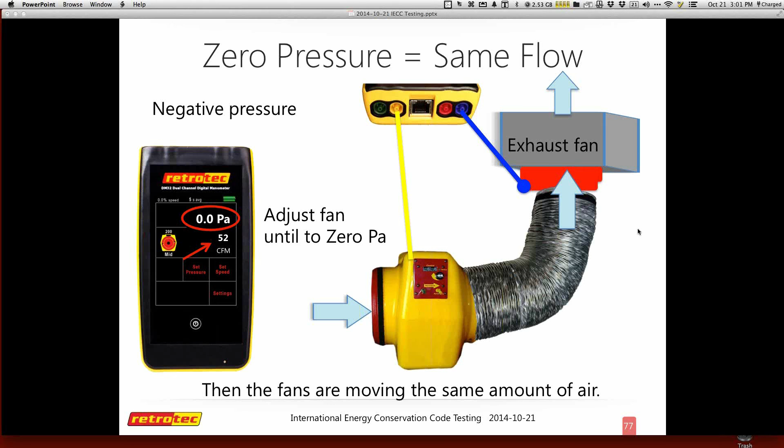So it went from a negative number, and then I was able to bring it to zero by adjusting the knob on the fan, and now I can actually tell you that that exhaust fan is reading 52 CFM. I have more about how to do that, so my goal is just to let you know there's a variety of ways that you can do that.

Kitchen exhaust fans can be measured by making a box with one open area, so I could use different devices to do kitchen exhaust fans like microwaves. Sometimes they have two openings or two fans, or a variety of challenges, but you can make a simple box out of rigid foam or something similar that allows you to test that with anything you're doing.

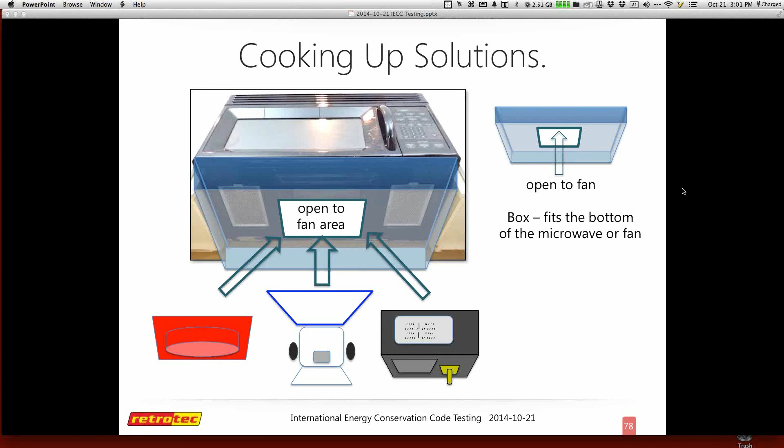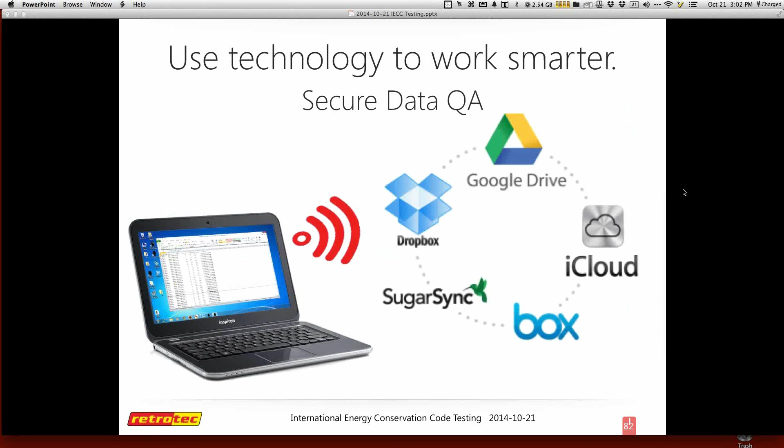I have a couple quick slides on ways to document your results. Retrotec has a data logger that creates an Excel spreadsheet you can send to your code officials. It's a great resource, downloaded for free, and works with either of the gauges, the DM2 or DM32. You can secure your data on any kind of Dropbox so you know it wasn't changed.

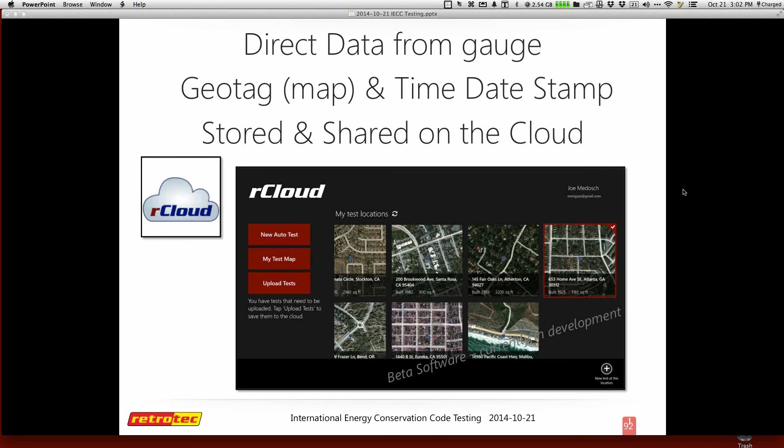Coming next year is an app that will be a phenomenal resource for the codes - you'll be able to get direct data from your gauge. It'll geotag and time-date stamp, store the data on the cloud, and you can send that to your building official, who can actually see exactly where the test was performed and when, and that it complied with the required results.